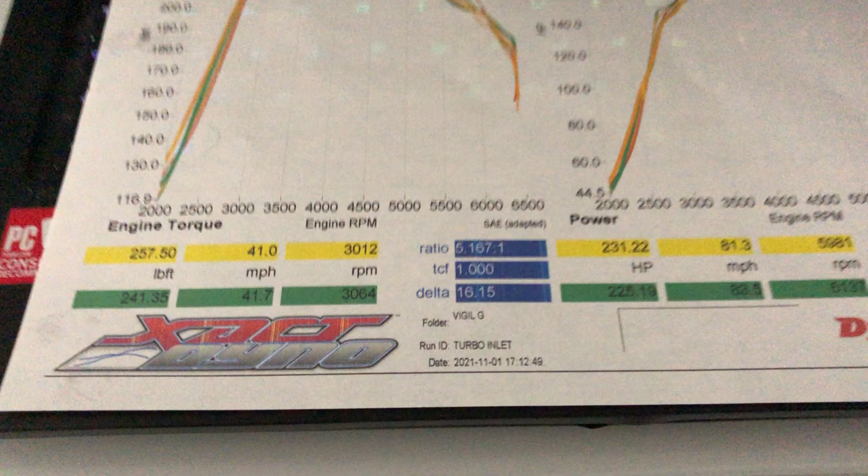All right guys, so here we are. I was just getting back from getting the car dynoed with the new inlet. So a couple interesting findings with the new inlet.

I had predicted just during my time driving with it that it did lose a little bit of ramp up on power, kind of in the 2,500 to 3,500 RPM range. As far as torque, it still felt like it was pulling fairly well up top. So those are just my thoughts. But again, I wanted to go ahead and get the car dynoed before I went ahead and explained sort of what I was feeling.

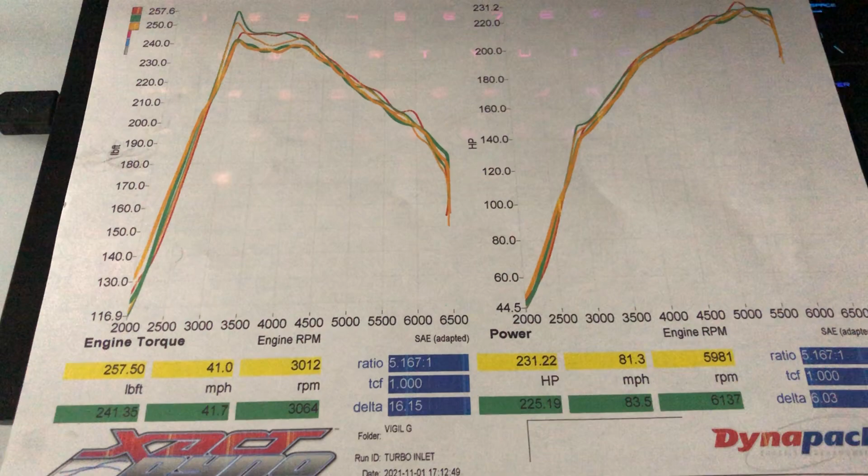So another thing, I also wanted to let the car run with the new inlet for a few days, so that way the computer could learn that something's changed and try to maybe make some adjustments.

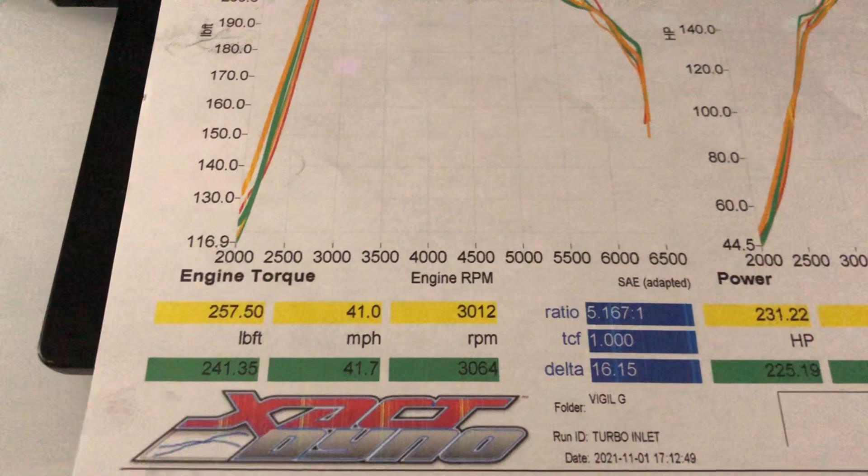So anyways, these are the dyno results. I also have a photo here that I can go over and show you in a little bit more detail because it's hard to tell on this screen here. But basically, we did lose a little bit of torque, which I noticed. We lost approximately 16 pound-feet of torque. And then we also lost about 6 horsepower.

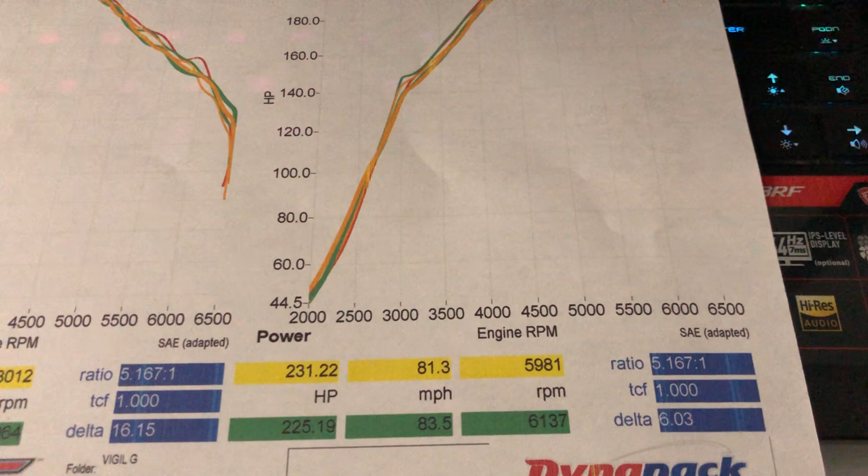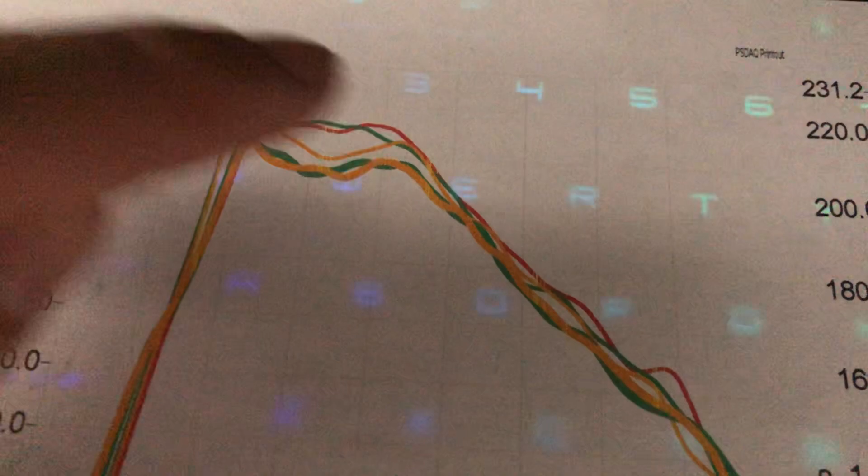We did 3 runs. The first one didn't come out that great. And the last 2, which you'll see here, are the solid lines, yellow and green at the bottom. So this is with the new inlet. And these up here were with the old inlet, I'm pretty sure that's what it was.

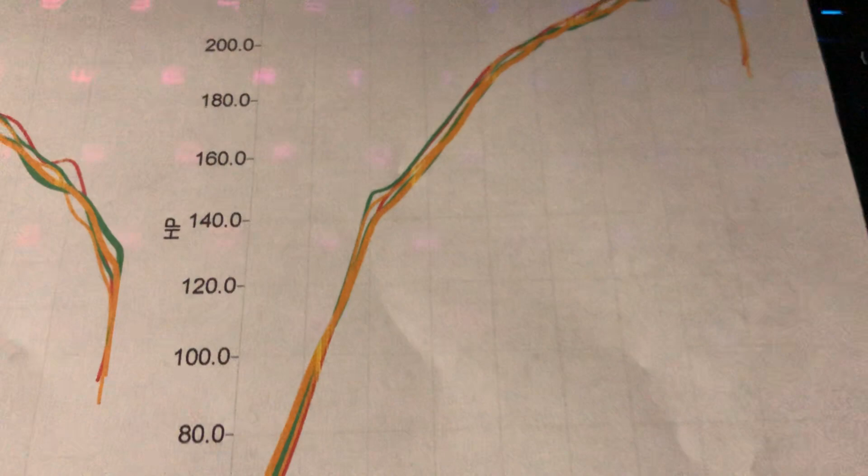And then here's the horsepower rating. The horsepower actually stayed kind of the same as far as the power band goes, with the exception of just a little bit less horsepower.

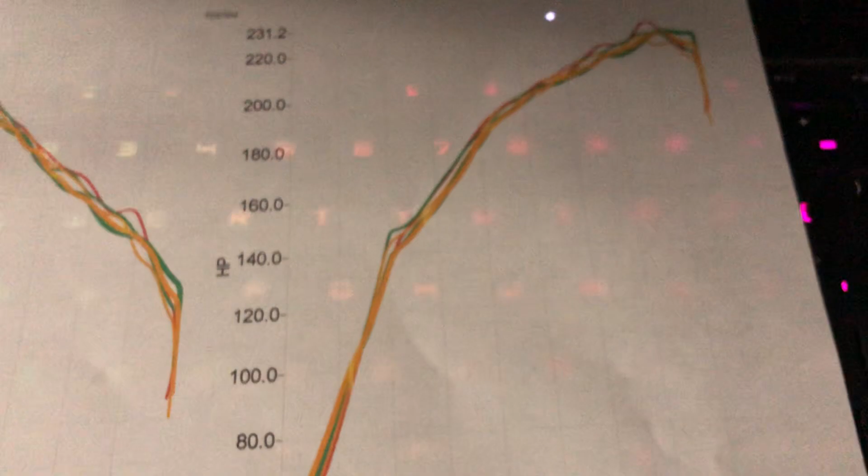So let's look at the screen here. I've got this zoomed in. So really, the places that I noticed the most were right here.

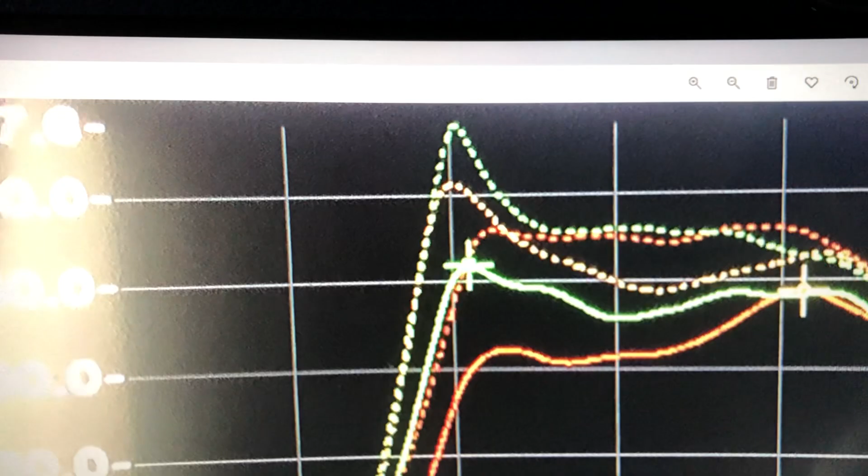So these dotted lines here were the old runs from the original inlet, and these two were from the new one. The third one's not included on this picture because I didn't get a shot of it, but there's a gap right in the power that you can see there, and the inlet that I used to run held it up here, whereas you can disregard this line here, that one didn't really come out well. But the new one was a little bit lower throughout here.

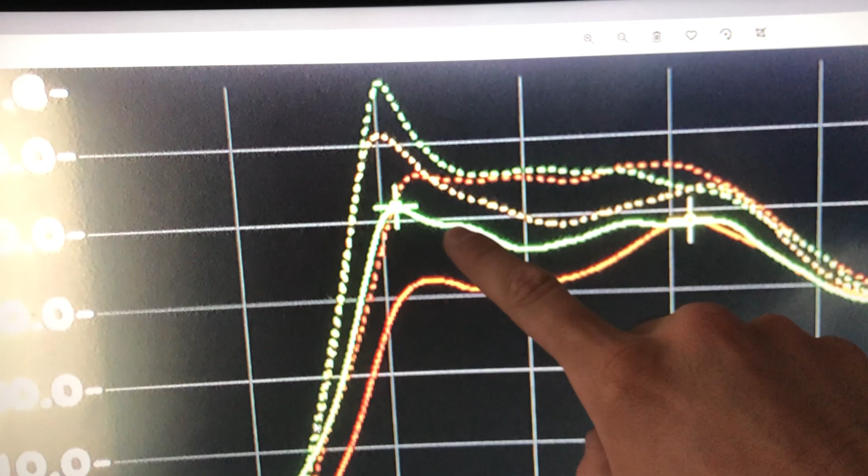And I noticed myself riding in the like 3,500 to 4,200 RPM range to get the power that I usually get. And even then, it wasn't the same. So that's the torque power band. We'll take a look at the horsepower band now.

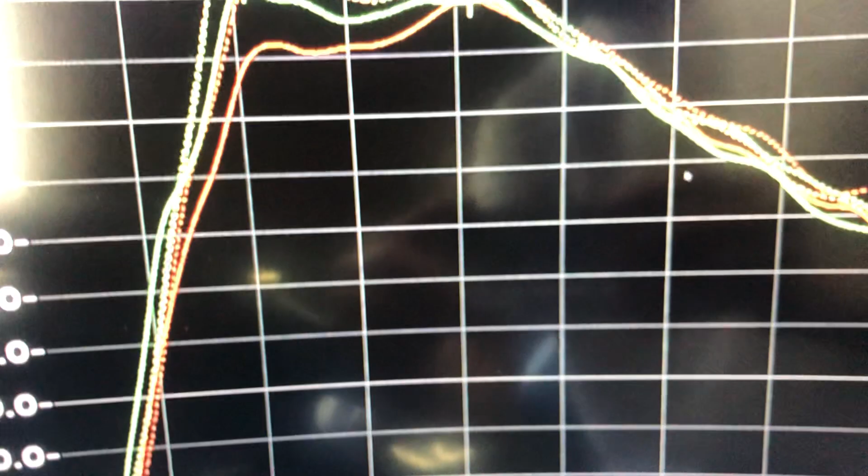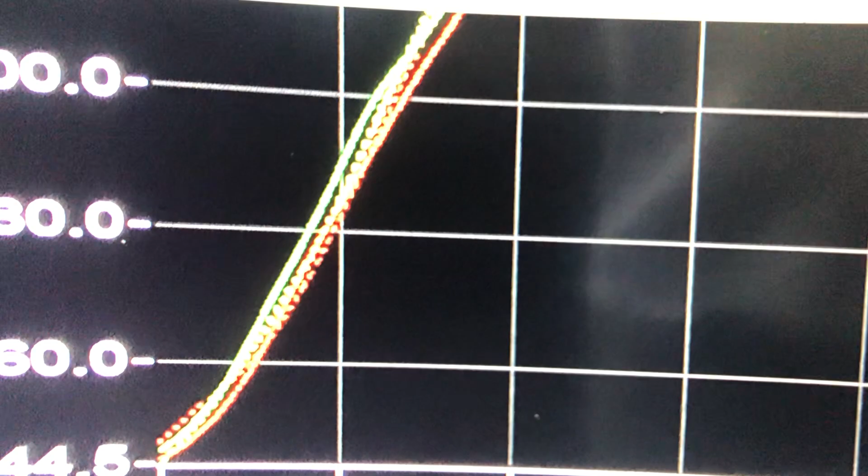Give me 1 second while I just go here. So in more detail, you can actually see that it's pretty darn close. They're almost all tied in, maybe a bit more horsepower sooner with that inlet, and then the old one sort of takes over here at about 3,000 RPM. So there was a really sweet mesh where horsepower and torque transitioned with the old inlet, and they continued to hold power.

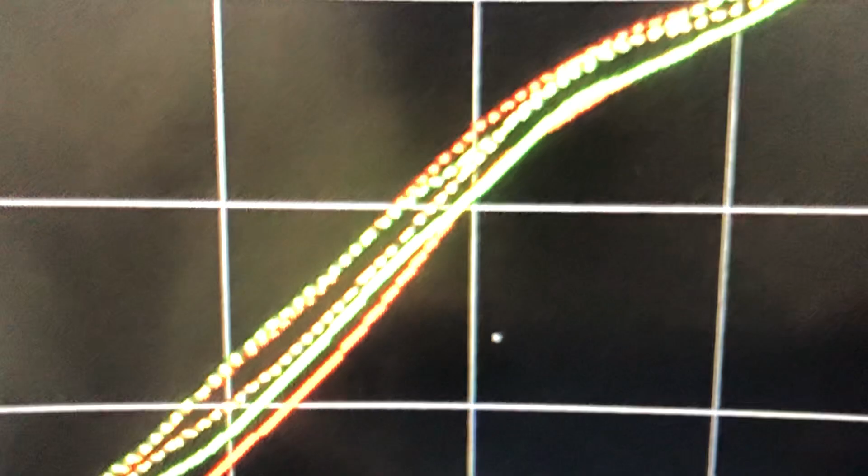So not what I was expecting. It's definitely what I felt. And when I say expecting, I mean before I installed it, when I was thinking about grabbing the inlet.

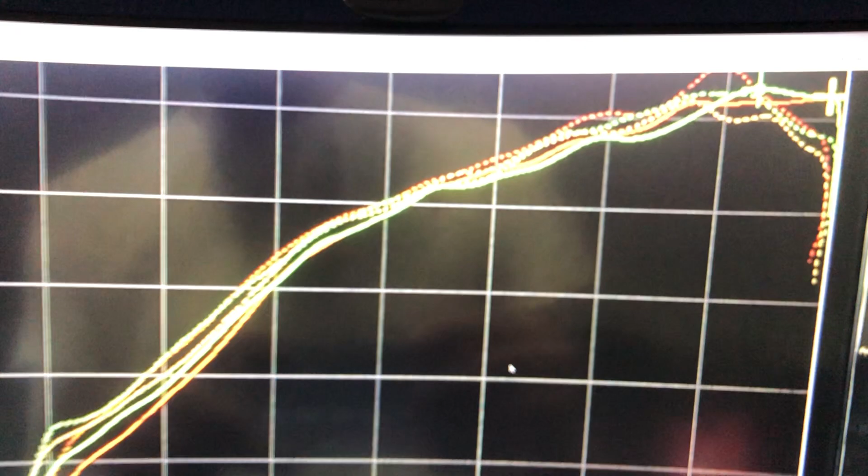So I think that it's probably going to be a little bit different on everyone's setup. For my setup in particular, with the Whoosh short ram intake, it made less. So I'm going to go ahead and have the old one put back on, because I do miss those 16 pound-feet of torque and those 6 horsepower that I lost.

But I think it might be different, right? Everybody's got a different setup. I'm sure there's a setup out here that'll work with it. I think that for the amount of increase in whistle and all these other obnoxious things that I actually like a lot, this isn't a bad choice.

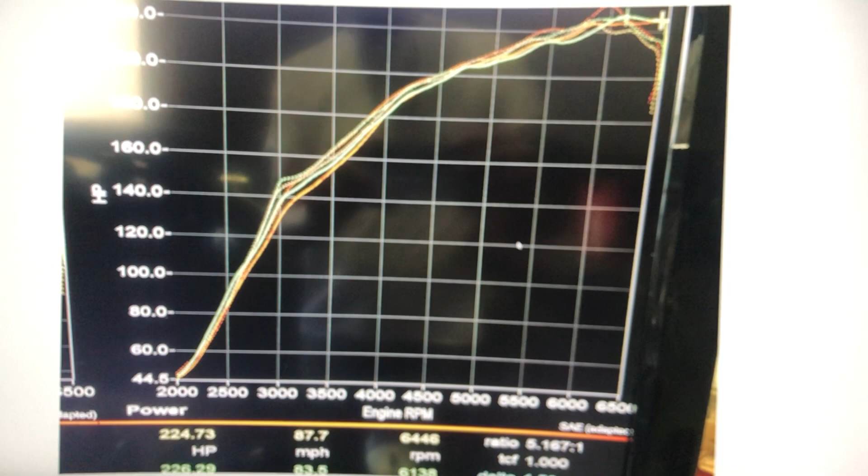Like for my setup, this is what the numbers are. I'm sure for a different kit it might be better, or it might be the same, or it might be like mine. But for those that are looking for something to make the car less obnoxious, this is still a great kit. The piece is super high quality.

For me, I'm just going to put the other inlet back on, and then I'm going to order the AIRTEC tubular exhaust manifold and get that installed. So I'll do that in the next few weeks, and then I'll post another update video when we see how that goes once I swap these over.

Then I'm also having some coilovers installed this week, finally, it looks like. So those are the K-Sport Pro Control coilovers, so I'll be giving my thoughts on those.